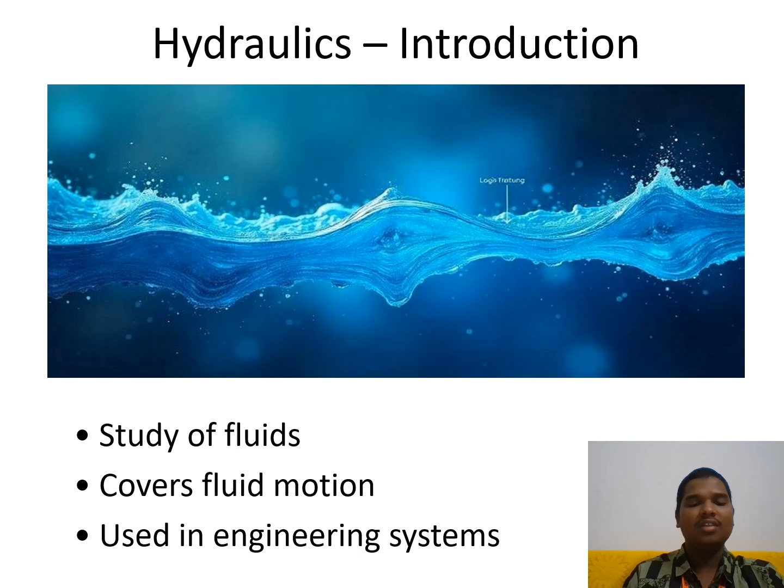To understand it better, let us now look at the formal definition of hydraulics. This deals with liquids and focuses on forces. Hydraulics mainly deals with liquids, especially water. It focuses on the forces acting on fluids and how those forces affect fluid movement. Engineers study how liquids behave under different pressures to design safe hydraulic structures.

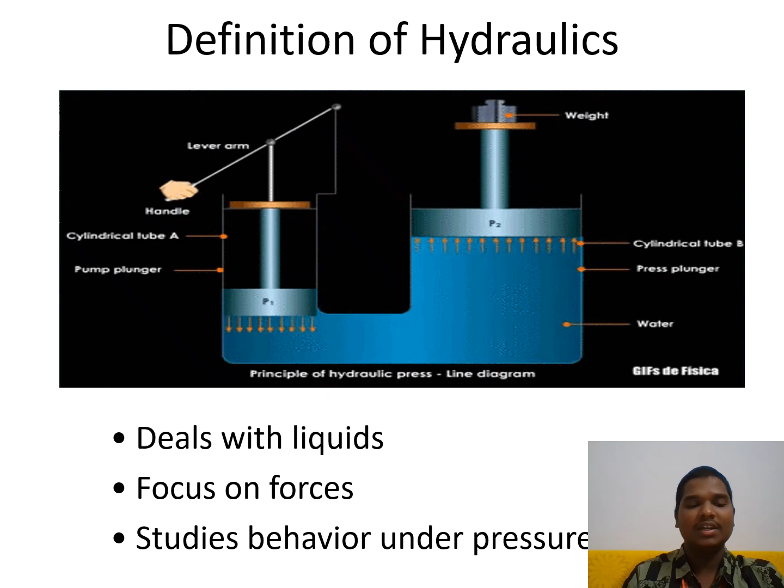After understanding the definition, let's explore why hydraulics is so important in engineering. Now let us go to the importance of hydraulics. Hydraulics is essential because it is used in almost every water related structure.

It helps design dams where enormous water pressure must be safely resisted. Hydraulic principles are used in canals to ensure smooth and controlled flow for irrigation. Pipelines for drinking water supply and drainage systems also depend heavily on hydraulics.

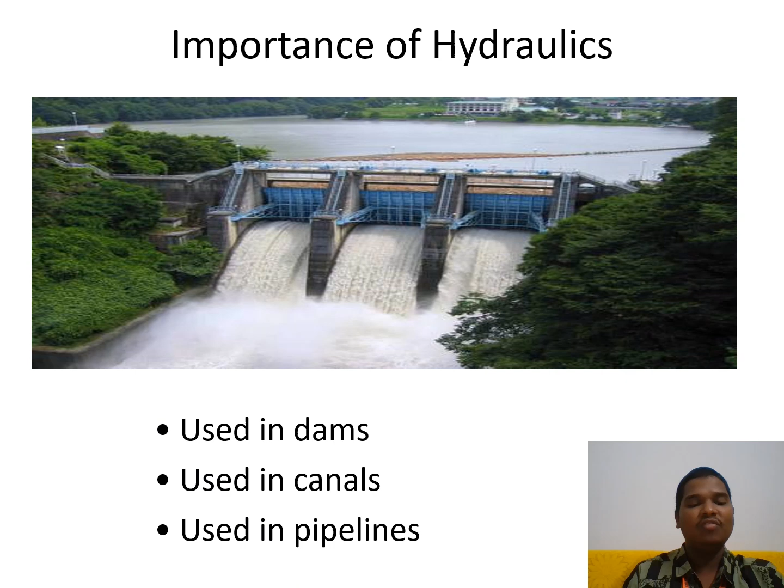To study hydraulics, we must know basic fluid properties. So let's move on to fluid properties. The fluid properties form the foundation of hydraulic analysis.

Density tells us how heavy the fluid is per unit volume. Viscosity determines how easily or slowly a fluid flows. Surface tension explains how fluid molecules behave at the surface, especially in narrow channels.

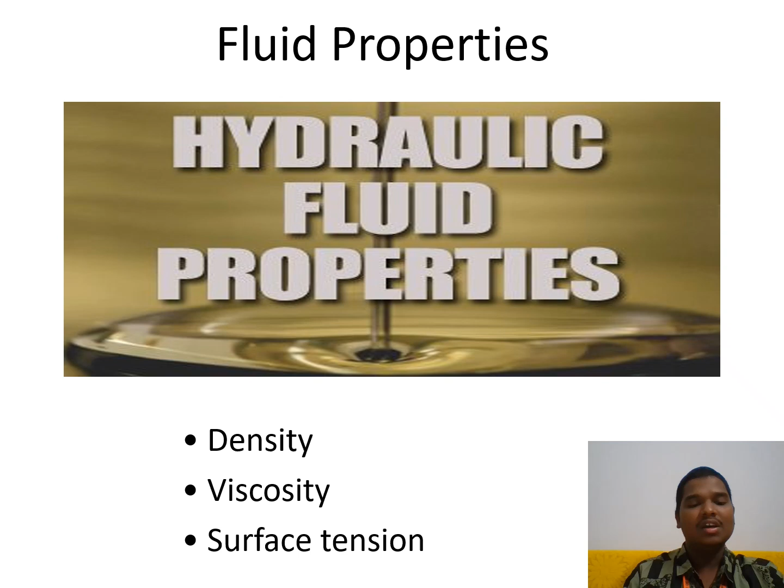Having understood fluid properties, now let us move to fluid statics. Fluid statics deals with liquids that are not moving. Pressure at rest increases with depth and affects structures like dams and tanks.

Pascal's law states that pressure applied at one point in a fluid is transmitted equally in all directions. Hydrostatic force helps determine the load acting on submerged surfaces such as gates and walls.

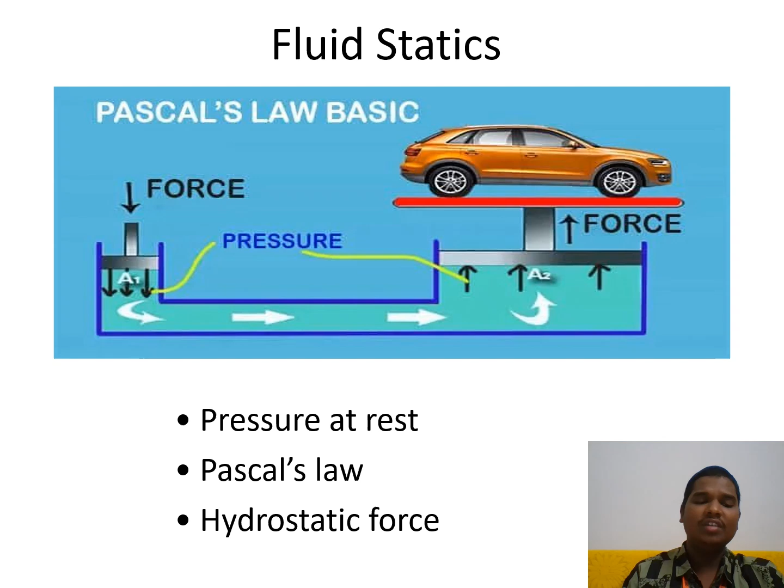Now that we know static fluids, let us understand fluids in motion through fluid dynamics. Fluid dynamics focuses on fluids in motion. Different types of flow—laminar, turbulent, uniform, and non-uniform—play a major role in design.

The energy equation explains how energy is transferred within the flowing water. The continuity equation ensures that the amount of water entering a system equals the amount leaving it.

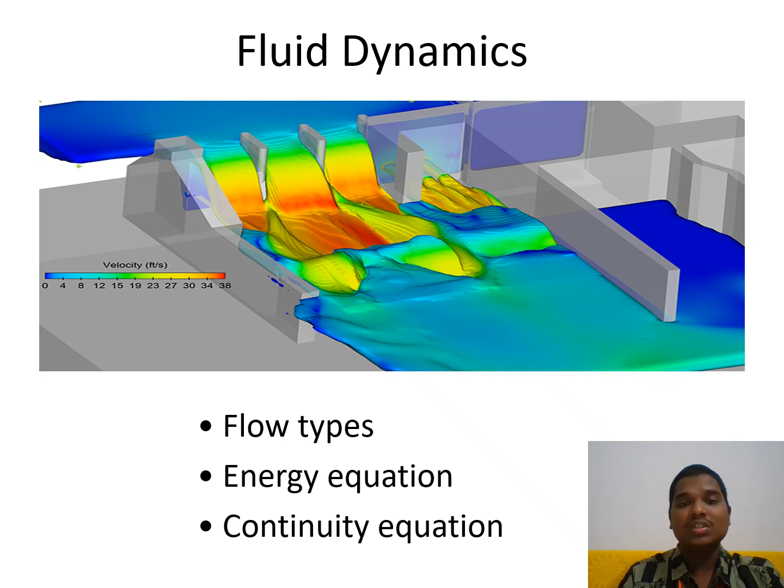Next, let us look at the hydraulic machines which use these principles. Hydraulic machines convert fluid energy into mechanical work. Pumps add energy to water and move it through pipelines.

Turbines extract energy from flowing water and are used in hydroelectric power stations. Hydraulic presses use high fluid pressure to perform heavy industrial tasks.

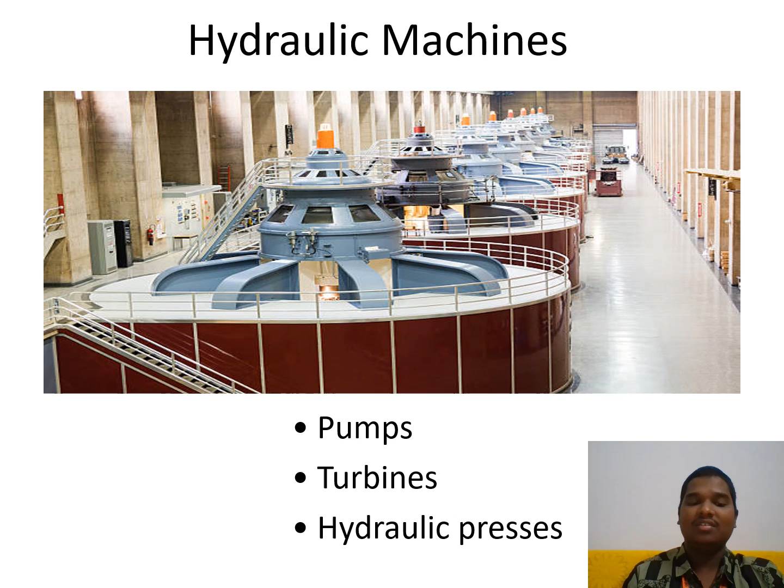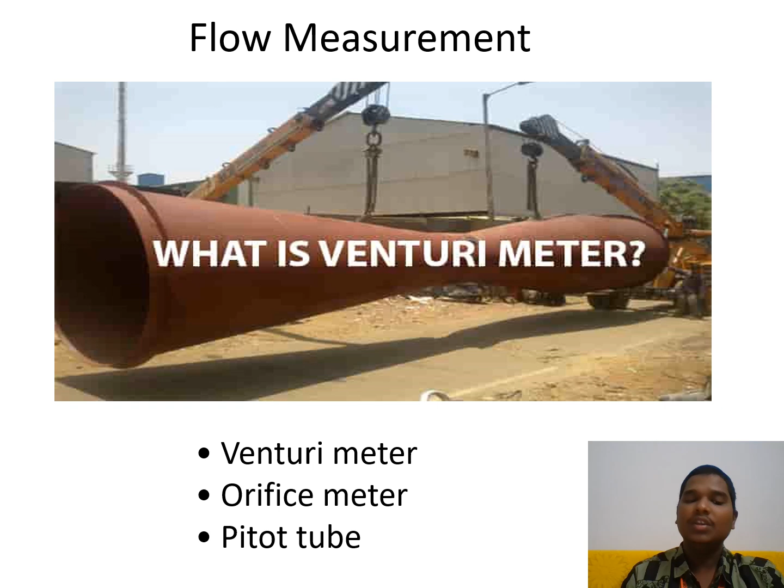After machines, let us understand how we measure water flow. Flow measurement devices help determine the flow rate of water. A venturi meter uses pressure differences to calculate discharge. An orifice meter measures flow through a sharp-edged opening.

A pitot tube measures velocity by comparing stagnation and static pressure.

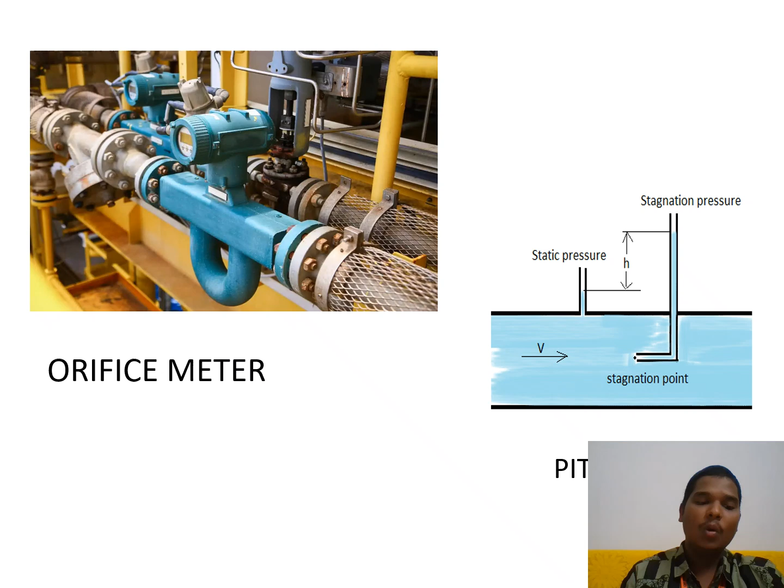Once we know how to measure flow, we can study open channel flow. The next topic is open channel flow. Open channel flow occurs when water flows with a free surface, like in rivers or canals.

Uniform flow means depth, slope, and velocity remain constant. Critical flow represents the balance between gravitational and inertial forces. Manning's equation helps calculate velocity based on slope, roughness, and channel shape.

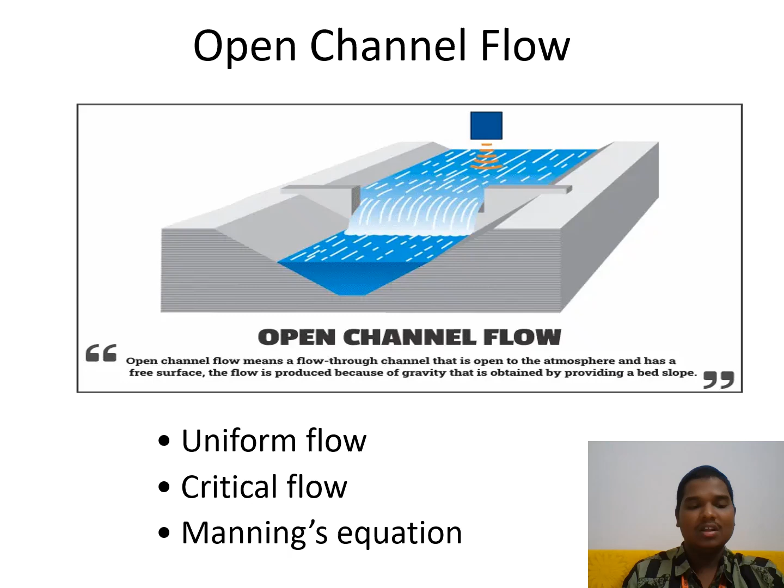Now that we understand hydraulic concepts, let us see their applications.

Hydraulics is used in irrigation systems to deliver water efficiently to fields. It is essential for designing water distribution networks in cities and industries. Hydraulic structures like dams, barrages, and spillways rely heavily on hydraulic analysis.

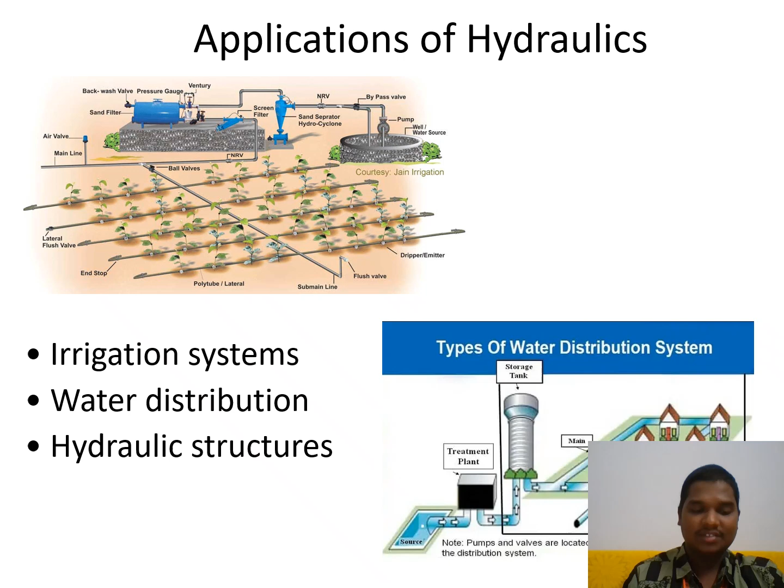Now, with hydraulics covered, let us move to water resources engineering. Water resources engineering focuses on managing water for various human and environmental needs. It ensures continuous water supply for drinking, agriculture, and industries. Effective water management supports economic development and improves living standards.

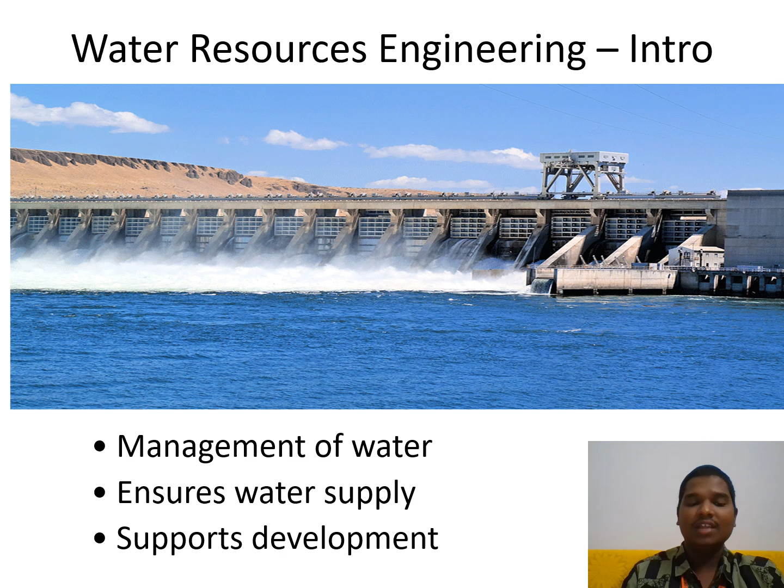Next, let us explore why water resources is important. It helps prevent floods by planning drainage systems and regulating river flow. It ensures sustainability by balancing water use and conservation. It improves water usage efficiency through modern designs and management practices.

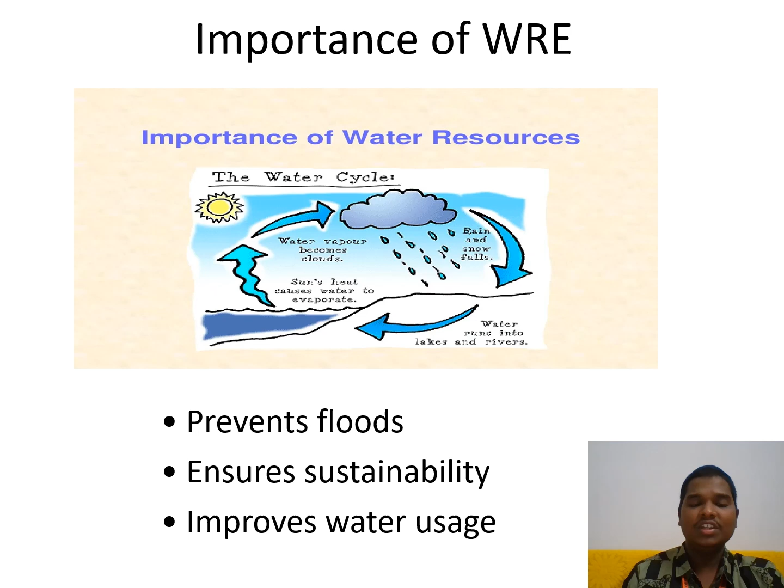To manage water, we must first understand hydrology, which is our next topic. Hydrology studies the movement and distribution of water on Earth. Rainfall study helps determine how much rainfall an area receives.

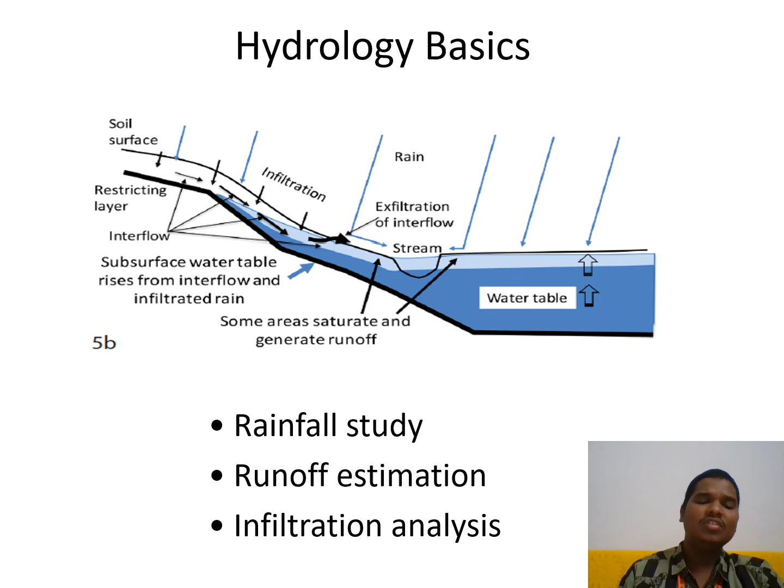Runoff estimation tells us how much water flows on the surface after rain. Infiltration analysis helps us understand how much water enters the soil to recharge groundwater. After hydrology, let us move to surface water resources.

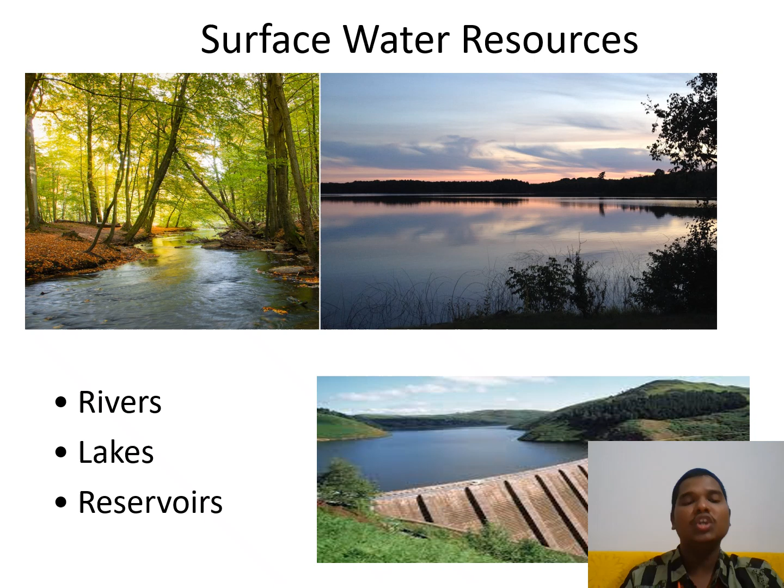Surface water resources include rivers which carry flowing water naturally across regions. Lakes hold water naturally and serve as major freshwater sources. Reservoirs are artificial water bodies created by humans with dams for storage and supply.

Now, let us discuss groundwater resources. Groundwater is stored in aquifers, layers of rock and soil that hold water. Wells are constructed to extract groundwater for drinking and irrigation. Recharge methods like recharge pits and percolation tanks help restore groundwater naturally.

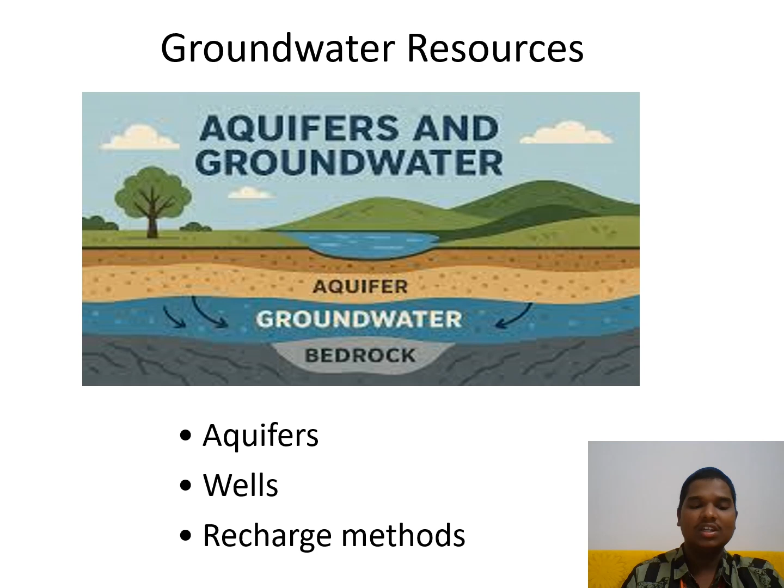Now, let us continue with irrigation engineering. Irrigation engineering ensures controlled water supply to crops. Canal systems distribute water across large agricultural fields. Sprinkler irrigation sprays water uniformly like natural rainfall. Drip irrigation supplies water directly to plant roots, reducing wastage, like many farmers use these days.

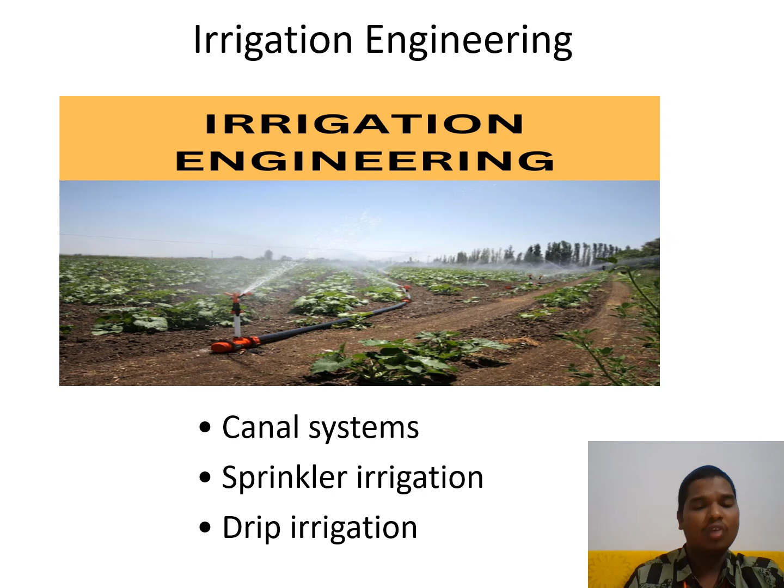Next, we'll move to water supply engineering. It ensures safe drinking water for the population. Treatment processes remove impurities and make water safe for us. Nowadays, chlorine is added to water to purify it more consistently.

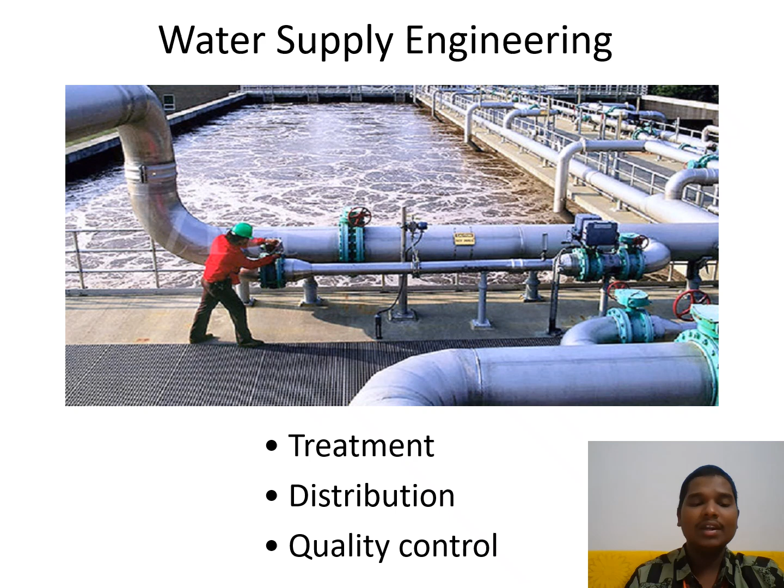Distribution networks transport treated water through pipelines and storage tanks. Quality control ensures that water meets health and safety standards. Now let us understand how water quality is monitored, evaluating whether water is safe and pollution free.

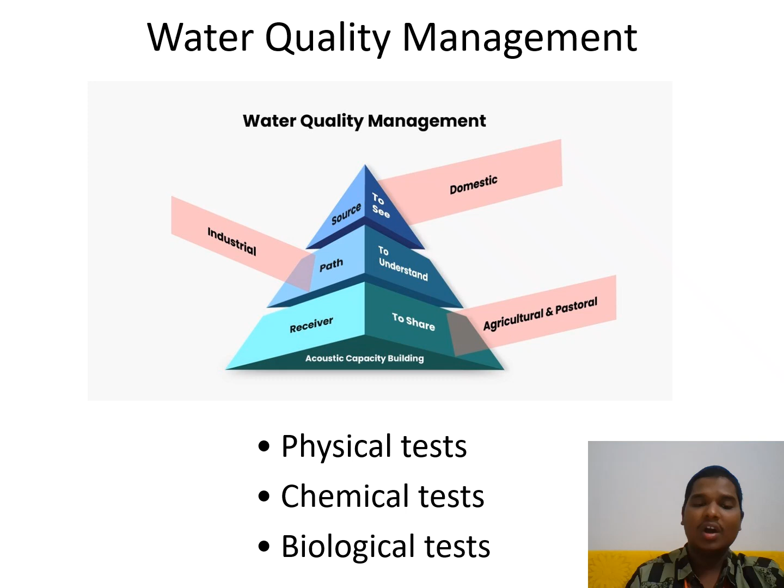Physical tests check properties like color and turbidity. Chemical tests measure pH and hardness and presence of harmful chemicals. Biological tests identify microorganisms present in water.

Next, we'll move to sustainable water management, which ensures long-term availability of water resources. Reuse involves using treated wastewater for irrigation or industrial purposes. Recycling further purifies water for more advanced uses. Conservation focuses on reducing wastage and promoting responsible water usage.

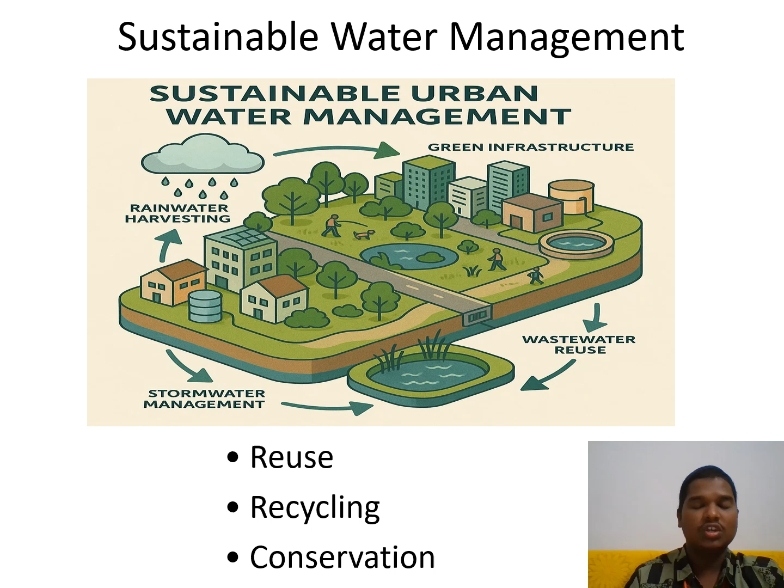Finally, let us look at the challenges faced in water resources. Climate change causes irregular rainfall, droughts, and floods. Population growth increases the demand for drinking water, irrigation, and industries. Urbanization leads to water pollution and over-extraction of groundwater.

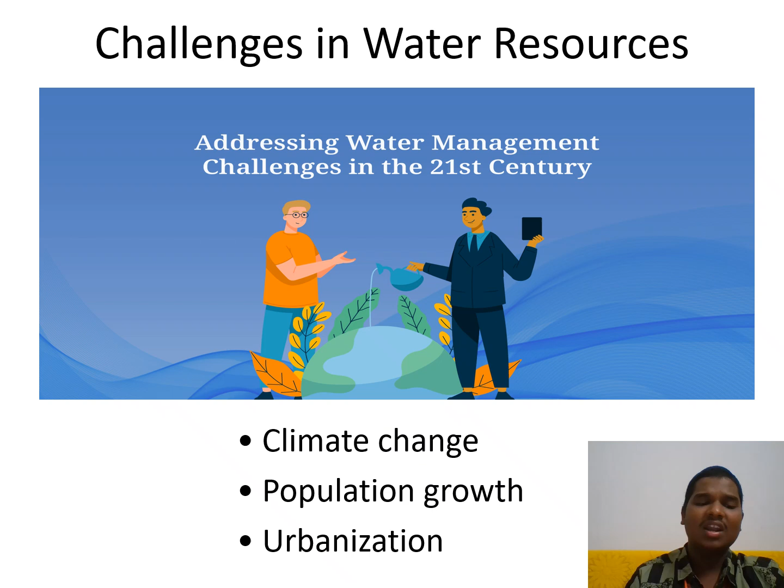With this understanding, let us conclude the presentation. Thank you. In conclusion, hydraulics helps us understand fluid behavior and design efficient water systems, while water resources engineering helps us manage water sustainability. Both fields are essential for solving modern challenges related to water supply, irrigation, hydropower, and environmental protection. Thank you for listening to my presentation.